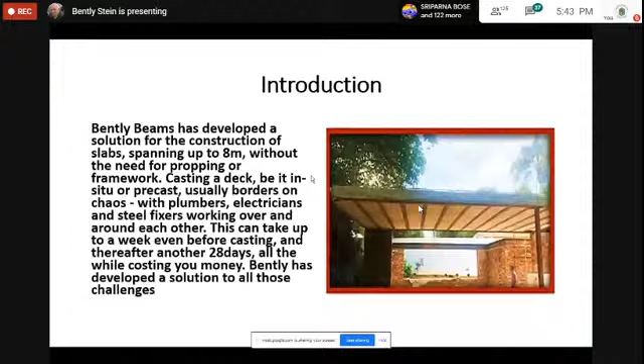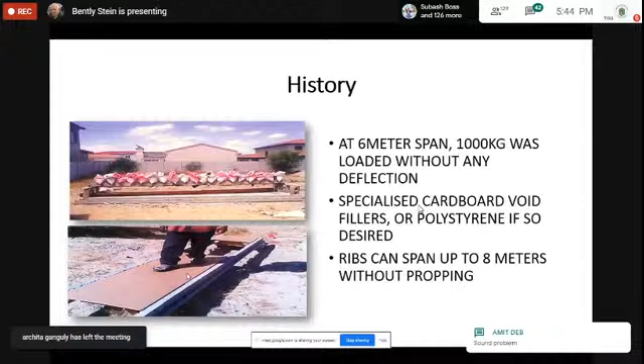This is the original void filler we used, which is cardboard. And here you can see a guy, this guy weighed about 80 kilograms, walking on it. There were no problems. Over here, we're throwing concrete. We treated this cardboard with a waterproofing agent, but there were 2 that we didn't treat with waterproofing agents, and none of them gave any problems.

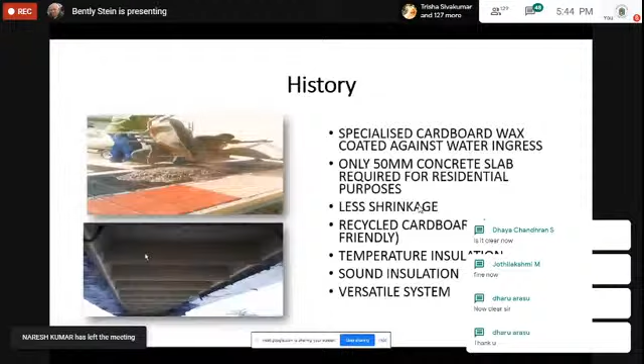And here at the bottom, you can see this was the cardboard system that we used right in the beginning. But unfortunately, it didn't close off properly at the bottom, and we changed the system and went for polystyrene.

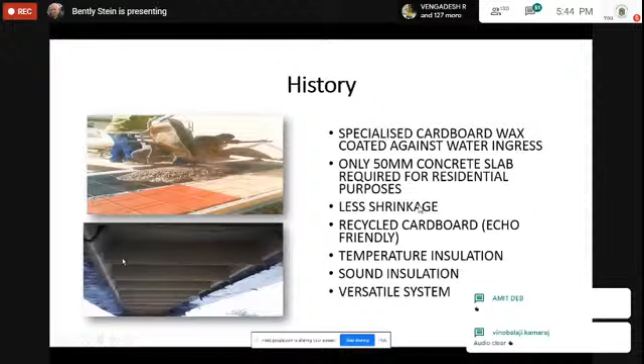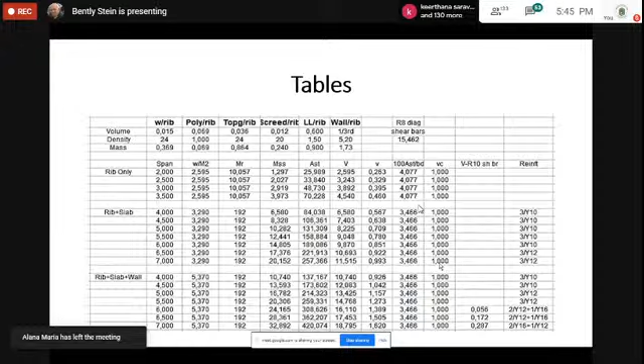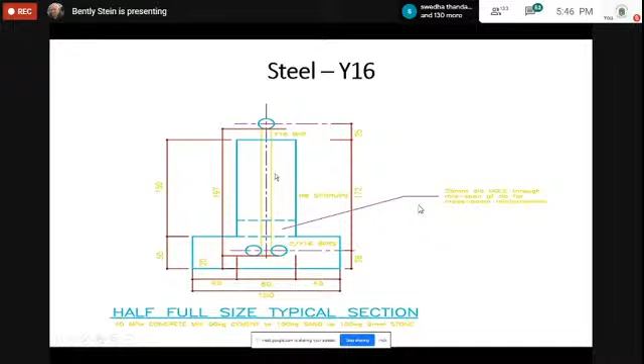Here's your 2 Y16s, and there's your Y16 on top. And the gap between that Y16 and the top of the concrete is 24 millimeters now. That enables the concrete to encapsulate that Y16 and to make it monolithic, so that it turns this whole thing into a monolithic structure, making it an I-beam or a H-beam as such.

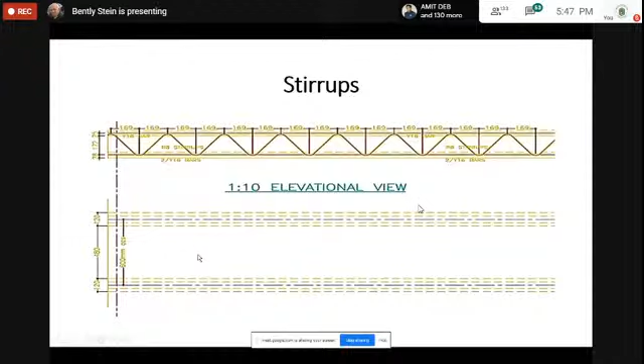And over here we have the two beams. And this is placed at 620 millimeter centers. And these beams actually carry all the load. And in between here, we put the polystyrene, and then we throw concrete on top of it. This is what our beams look like. Sorry about that. This is what the beams look like.

We started with 40 MPa. We graduated to 50 MPa. And finally, we settled on 65 MPa at 21 days, which gives you 45 MPa after 7 days. The results of this were less deflection, less cracking, and less vibration, because the slab tended to vibrate a little bit until it cured properly. 10 beams are cast in a mold, and we cast the beams to the sizes requested on the particular job.

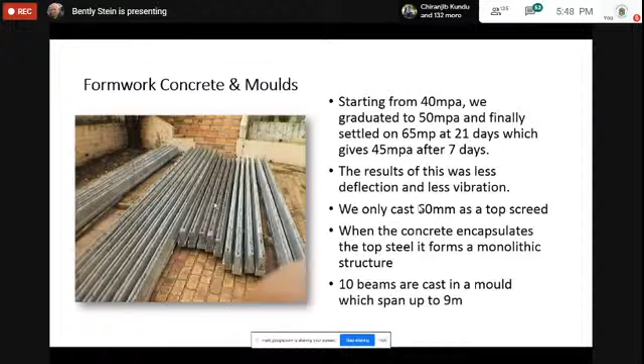Suitable for use in all industrial, residential and commercial buildings as an under roof and side cladding insulation material. Moisture: the polystyrene is non-hygroscopic and not affected by moisture. Not affected by bacteria, mold or fungi, and has no nutrient value for insects, birds or vermin. This will remain effective as an insulant for the life of the building. The polystyrene used is manufactured from recycled waste polystyrene.

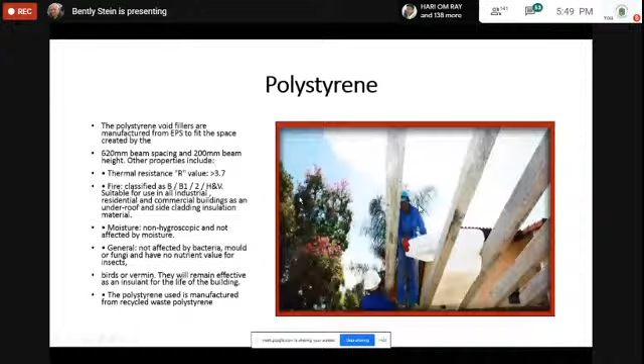Here we have an installation job which was done in Louis Trichardt. And you can see over here, on this particular job, this was 630 square meters. We started at 7 o'clock in the morning, and by 1 o'clock we'd finished installing. We went in the afternoon and we just sorted out the few problems that there were, packed all the polystyrene, etc.

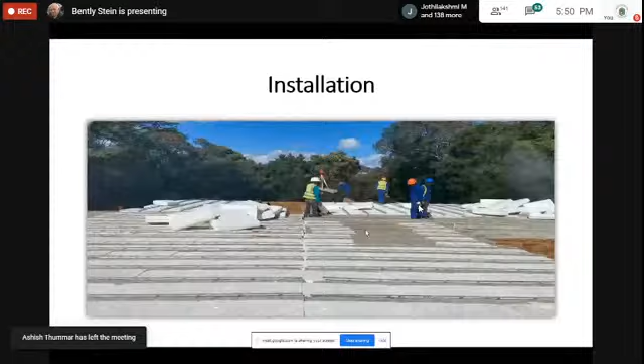And then we came back, well, it was lockdown then, so we came back 2 months later to pour the concrete. So here you can see them, and here we're installing with a crane. By 1 o'clock we were finished.

And over here, we've got a job which we did for a gym, Virgin Active gym, in fact. And you can see here the beams are not propped at all. And there's your polystyrene there, and here's your mesh, which was reference 100, which we put on top. And there you can see the amount of concrete. In this particular case, we only put on 50 millimeter concrete. And later we changed and we went to 60 millimeter concrete.

This was for Virgin Active gym. People are gymming on it. They're doing weights on it. They're running and jumping down on it. And there's a lot of people in there.

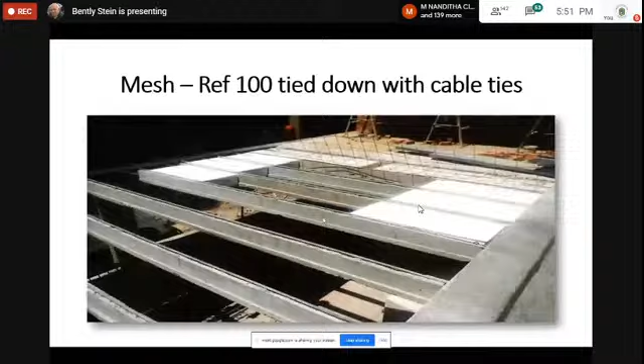Here we have them throwing concrete. This was in the job that we did in Louis-Trichardt, that big job for 630 square meters. And over here we're throwing 60 millimeters of concrete. This was something that we moved up to. Here you can see he's got his stick and he walks around judging and checking that the whole slab is 60 millimeters thick.

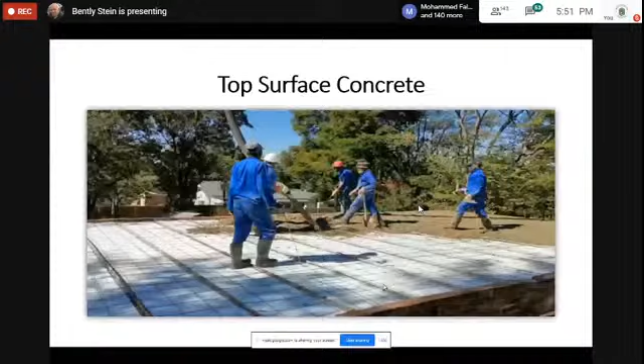Here you can see them pouring concrete. There's no problems. I mean, here the guys are walking on the polystyrene. We don't have any problems. I just need to have a look here and see. Okay, so basically that's the beams itself. And it shows you how strong they are.

Now we've moved on, and this is, it's not there. You put it on the wrong one.

This is a cement mix which we've made, which sticks to the underside of the slab, the polystyrene. And all we do is we supply it in buckets. We had a problem previously where people told us, how do you plaster the underside of the polystyrene? So we developed this plaster which you just skim on and it sticks. It comes in 30 kilogram buckets, and it's made a hell of a difference.

It sticks to cement, it sticks to rhino board, brick and polystyrene. And it's designed to reduce cracks because we put fibers in it. You can use it outside on the exterior, whereas the particular rhino material you can't use on the outside because it's not cementitious.